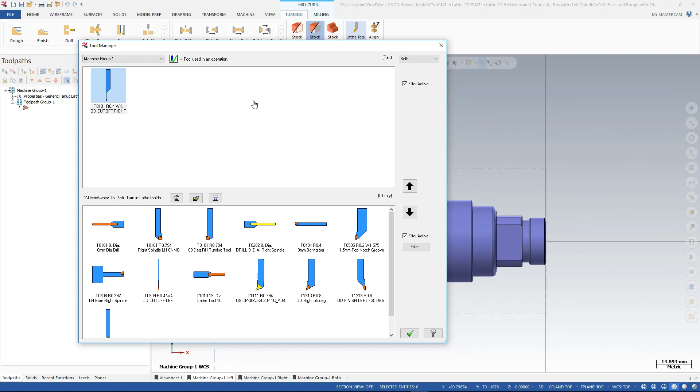Notice the numbering of the tools in the library. Our drill is T0101. Our left-hand turning tool is T0101. Our drill facing to the right spindle is T0202. I'm going to grab all these tools and drag them up. And you'll notice that they have now been renumbered.

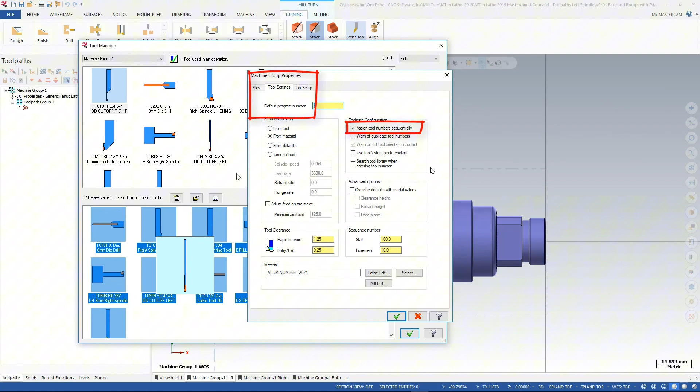This is because I have assigned tool numbers sequentially selected in the tool settings. I believe this is on by default. When working with libraries of your own, you might want to turn this setting off.

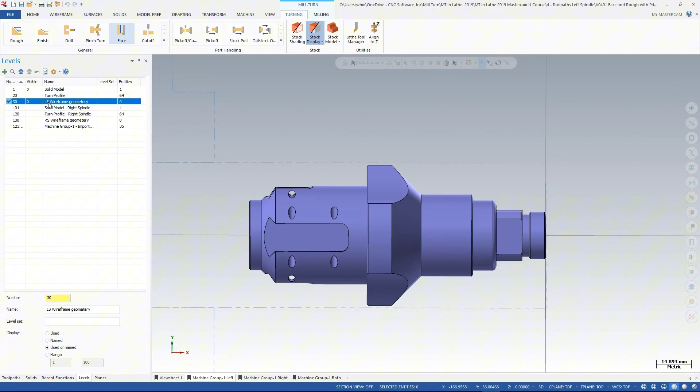Let's start to create some toolpaths. I have created level 30 and 130 for the geometry created by the toolpaths we will be creating. I've made level 30 active. I'm going to turn off the solid model and turn on the turn profile. I like what I see right here. I could adjust the screen if I wanted to, but I'm going to go ahead and save this view sheet bookmark so we can return to here easily.

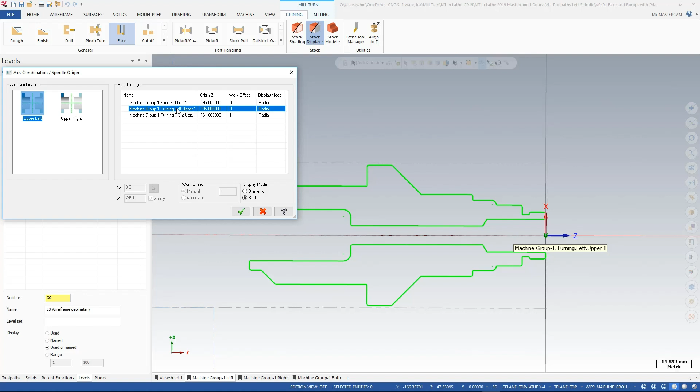I'm going to go up to the facing toolpath in turning. First thing we want to do is go to the proper axis combination. In this case, this will be upper left. We have a few options here, but of course we want the turning upper left. It's good workflow to incorporate the axis combo first into the toolpath. The axis combo pairs a spindle and a turret. It will also filter lathe tools in the library available for use with that particular axis combo.

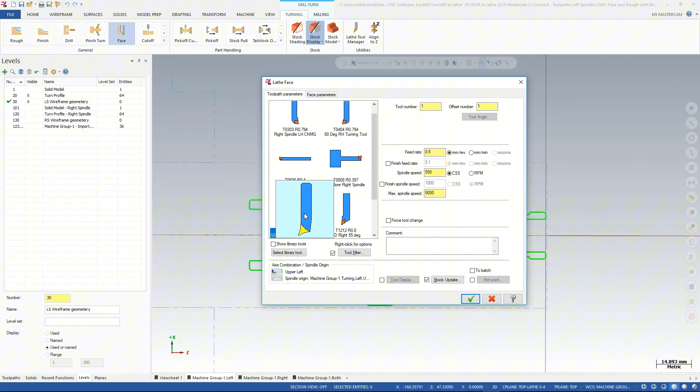I'll go back and select the tool. We're going to use the A-style prime turning insert for both the facing and the rough operation. I'm not going to change speeds and feeds. I'm going to work with whatever defaults we have. I'm concerned with the toolpaths and the process itself.

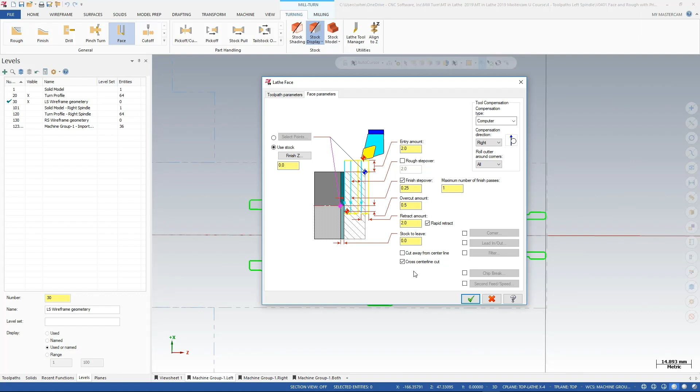I'll go to the face parameters and I'm going to change the overcut amount to get past center just a little bit. And I'm going to use the cross center line cut. This is the most efficient way to use the prime turning tool for facing when we can get across the center line. So we have a toolpath created. I'll go to the toolpath manager and I'll backplot this. Looks good, and you can see that we are using a 3D tool here.

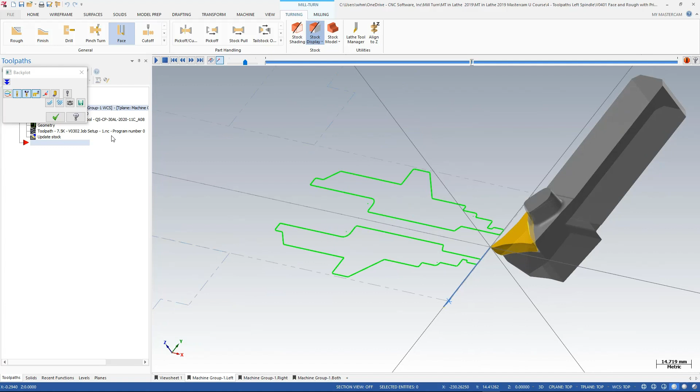I'll say OK to this, and I want to take a look at this new tool. So I'll double click on the insert and you can see that it opens up the tool designer. 3D tooling is new in Mastercam 2019. You can see the different components to the tool designer.

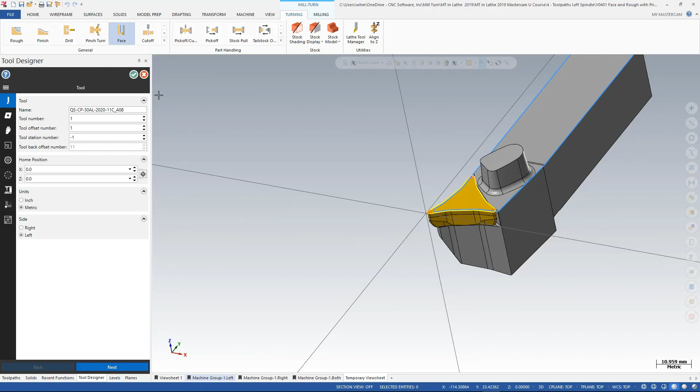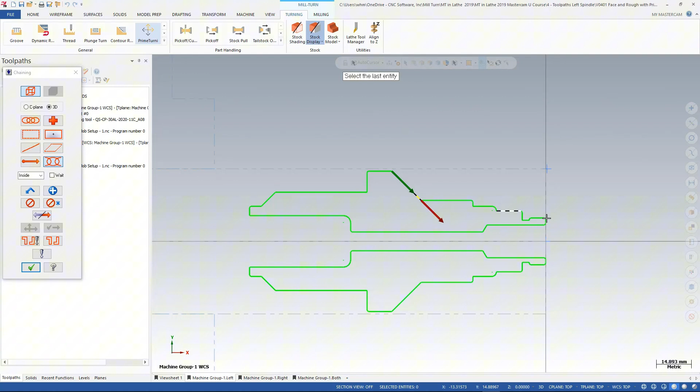I'll be using a combination of conventional parametric tooling as well as some of the new 3D tooling in this project. I'm going to return to my view sheet left, and then I'll go up and select the prime turning toolpath. Prime turning toolpaths were introduced in Mastercam 2019, and they are a little different than conventional toolpaths. I'm going to use a prime turning toolpath to rough the material on this part. And we'll start by picking out the chain, starting here and going down to the chamfer on the front.

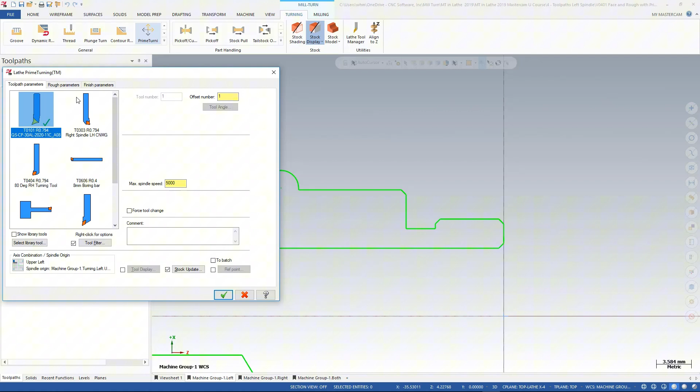We have three different tabs, a rough, a finish, and the toolpath parameter tab. So the first thing we want to do is select our axis combo, and we want turning upper left. We have our tools selected. And in rough, we'll come back to that in just a second. And we don't want to finish. So I'm just going to turn off the finish part of this toolpath and come back into the rough parameters. So we can see that we are going to rough it.

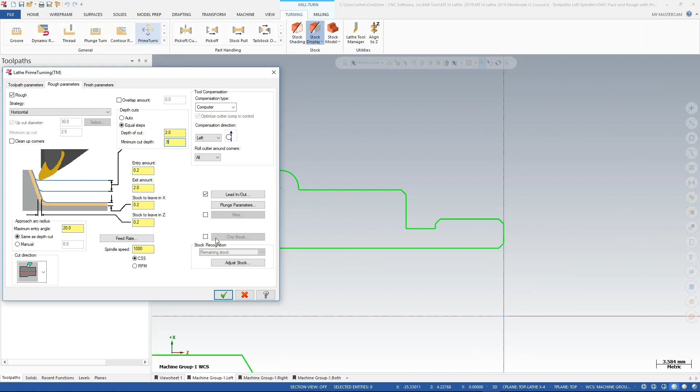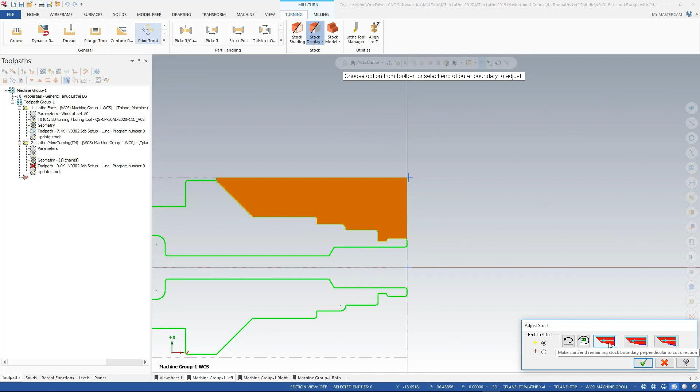The strategy we're going to pick is horizontal. We'll take a depth of cut of 2 with a minimum depth of cut of 0.5. And I want to take a look at the stock that it sees. So this is what I would expect. Prime turning uses stock to calculate the toolpath. So checking to see what it sees for stock is always a good idea. If for some reason you don't see something similar to this, you can adjust your stock using these controls here.

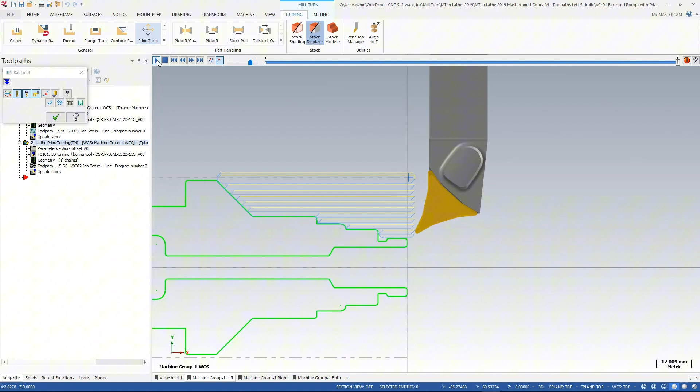So I'm going to go ahead and green check out and see what we get. So we have a nice looking toolpath here. That's good for now. I'm going to go ahead and backplot this toolpath. You probably noticed I chained in an opposite direction from a normal turning toolpath. This is the motion that is most efficient for PrimeTurning tools. Due to the design of the insert, it allows them to run at significantly higher speeds and feeds than conventional toolpaths, and usually gives better chip control as the motion is away from the spindle.

I've just scratched the surface here with PrimeTurning toolpaths.